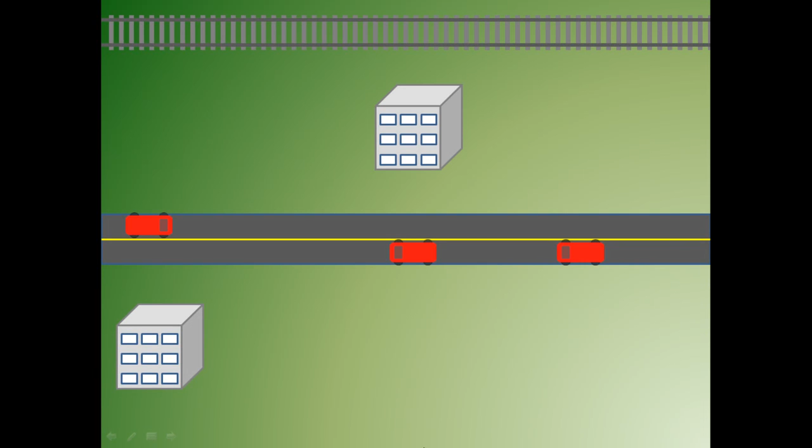This 10-minute presentation is in several parts explaining how this study is critical in protecting national infrastructure while avoiding regret and exorbitant cost. Consider a transportation corridor facing future land development. Land development adjacent to corridors not only leads to greater traffic along the corridors, but also requires taxpayer funding for protective measures to be taken in order to minimize congestion and loss of productivity in the area.

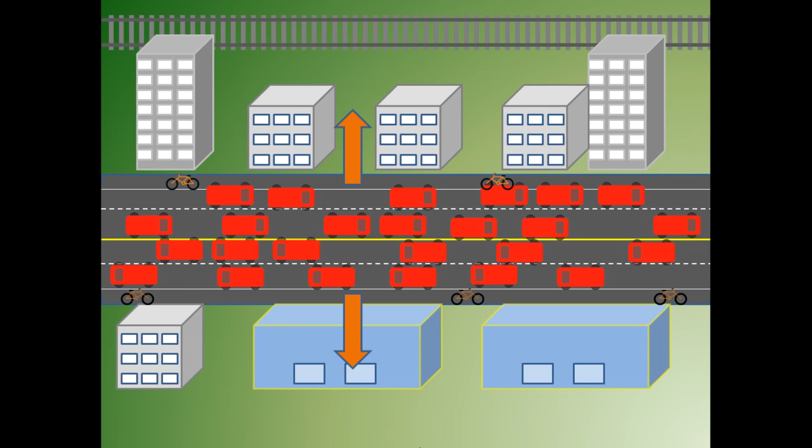Eventually, costly right-of-way may need to be purchased for corridor improvements. However, if proper proactive planning is not implemented, land may not be available, causing serious problems for the transportation infrastructure. These serious risks need to be studied and managed in order to avoid surprise, regret, and belated action. This problem extends across all varieties of infrastructure systems. Of the U.S. Department of Homeland Security's 17 most critical infrastructure list, some, more than others, have a geographic component.

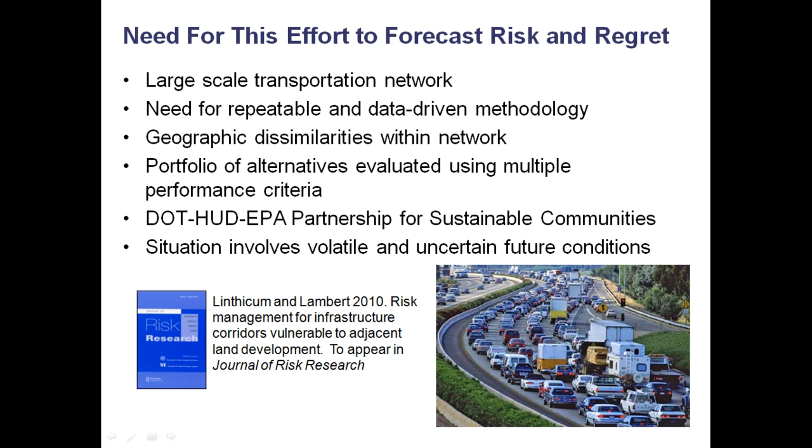The goal of this study is to analyze a large-scale transportation network vulnerable to adjacent land development and prioritize sections of corridor for investment. An earlier approach to this work by Linthicum and Lambert was found to have particular deficiencies. This study contributes to the literature by incorporating the time domain on intervals, can easily be updated with new information, addresses geographical differences in development patterns, and considers volatile and uncertain conditions, such as climate and other environmental changes, changes in social or demographic patterns and land uses, changes in regulations, as well as many others.

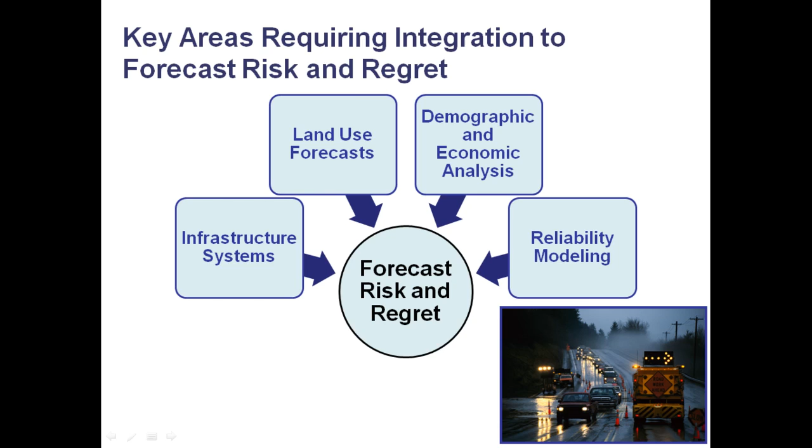The adverse consequences of unexpected land development may include unnecessary congestion and inefficiencies along critical transportation corridors that may lead to lost productivity, increased fuel emissions, and loss to nearby businesses. In extreme events, the consequences can be even more severe. Corridor protection involving improved access management and capacity increases may encourage development and population growth in some areas, thereby allowing for greater efficiencies in the transportation structure. Greater economies of scale can be found in densely used areas, while increased tax revenues and employment aid entire communities.

It becomes apparent that there are important trade-offs between risk and opportunity in this study. These will be quantified and evaluated in order to make the best decisions for the transportation network as a whole. Costs include cost of planning time, including salaries and overhead, right-of-way purchasing, construction or operational changes, access management, and others.

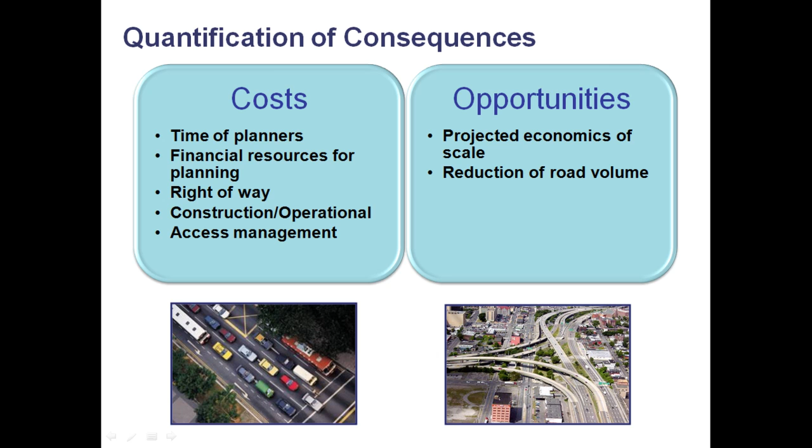The most challenging aspect of the data extraction involved the integration of quantitative and qualitative data available in widely varying scales. The Landsat National Land Cover Database offered geographical land use and land use change information. The Bureau of Economic Analysis gave us valuable employment and economic indicator data. The U.S. Census shared a wide array of socio-demographic data. The Department of Housing and Urban Development held key indicators on housing and affordability. These databases, in addition to many others, were essential for this effort.

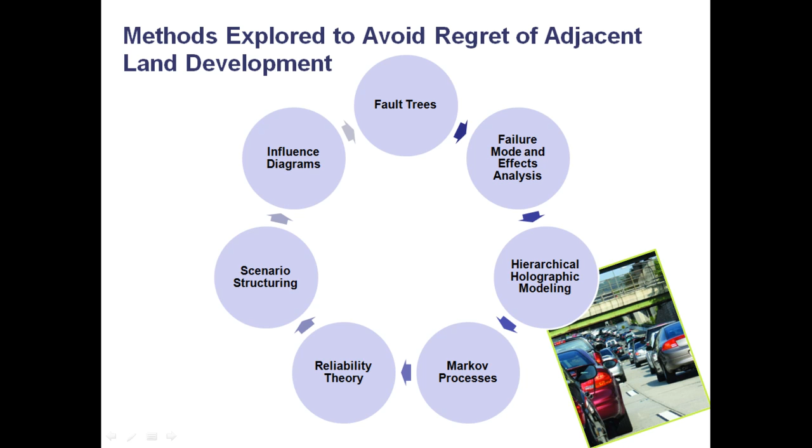Expert elicitation with officials affiliated with transportation planning, economic development, and others allowed for determination of the most relevant factors, an understanding of the relationships between those factors, and the financial costs and opportunities. The objective is mainly influenced by the determined time to development, cost for protection, and the opportunities arising from protection.

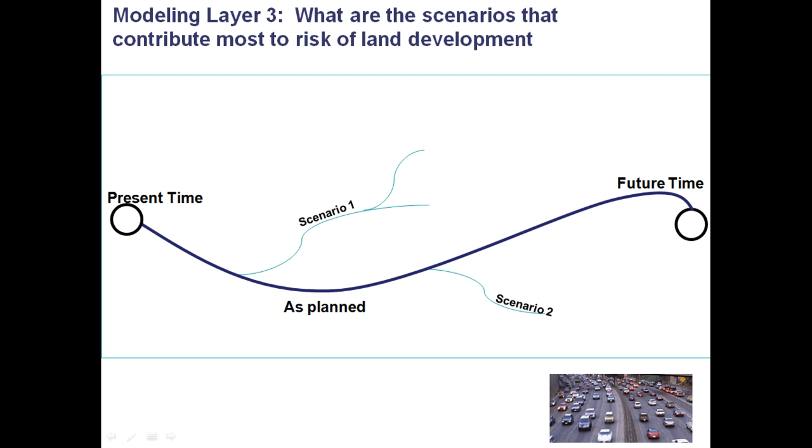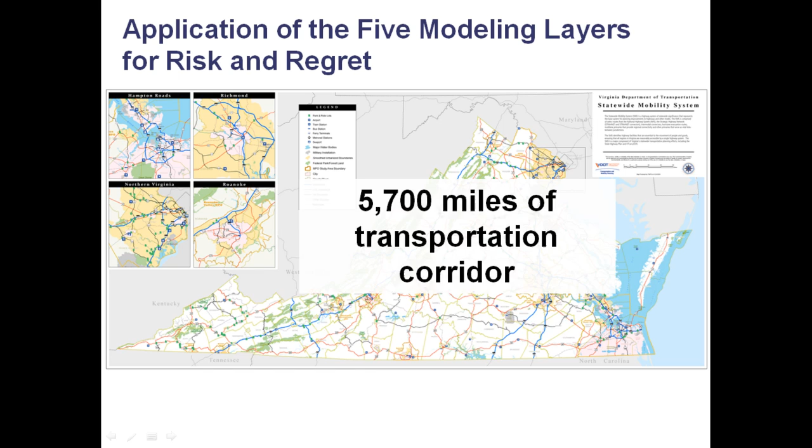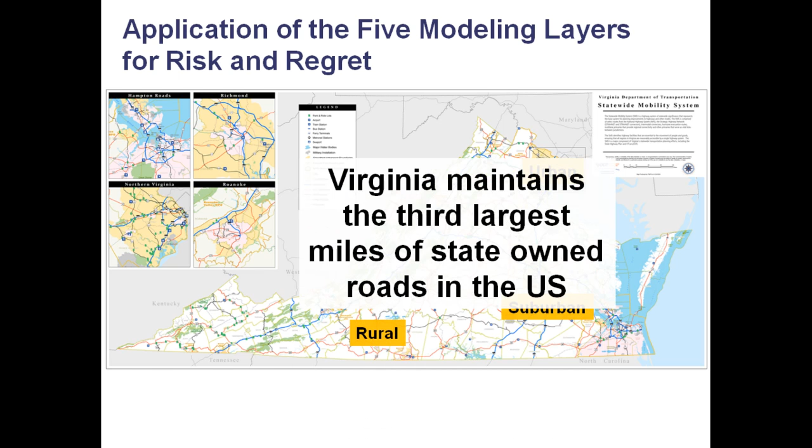This method is being tested on the Virginia statewide mobility system. This large transportation network spans over 5,700 miles, joins 95 counties and 39 independent cities, and neighbors 5 states. This network covers a very geographically diverse area, including the largely urban north, suburban areas, and largely rural areas. The diversity in areas throughout the state causes separate land development patterns to exist between rural, urban, and suburban areas.

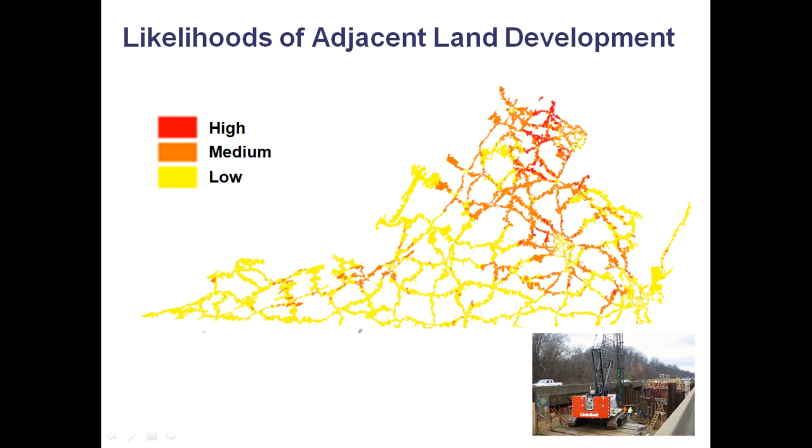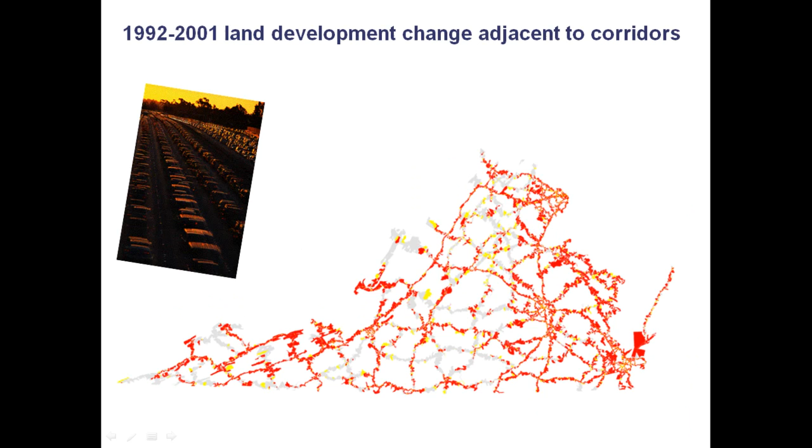Factor data is then combined using relationships elicited from experts to quantify likelihoods of land development for each census block adjacent to the studied corridors. The fourth model analyzes the time to development for sections of corridor. Markov models and reliability theory aided in the conversion from the likelihood of development to an estimate of time to development.

The fifth model illuminates the options that are available. Costs and benefits are weighed along fixed-length time intervals, in this case 5, 10, and 10-plus year periods. This allows for first-pass decisions to be made regarding prioritization. Prioritization results show darker areas requiring the most prompt action. The outputs of the priorities can then be evaluated by transportation planners to make future funding decisions.

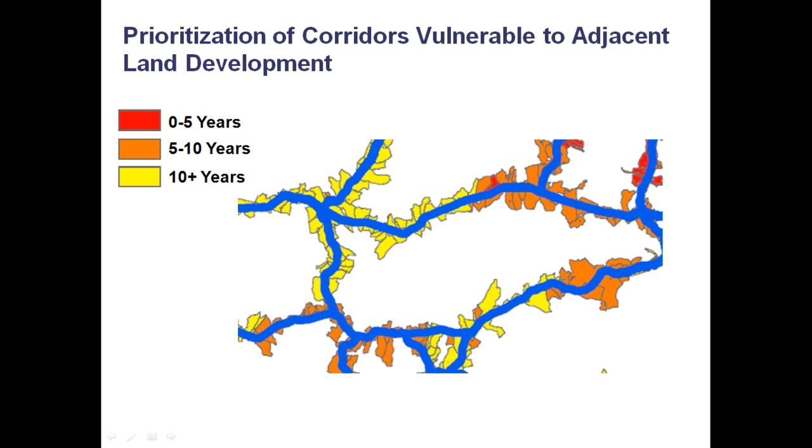However, once initial prioritizations are made, there is much more to be learned. The automated nature of this analysis allows for complex calculations of multiple scenarios to be quickly computed. As expected, many corridor sections show different prioritizations and extreme differences in costs. From a risk viewpoint, these critical scenarios pose the greatest concern and required further study.

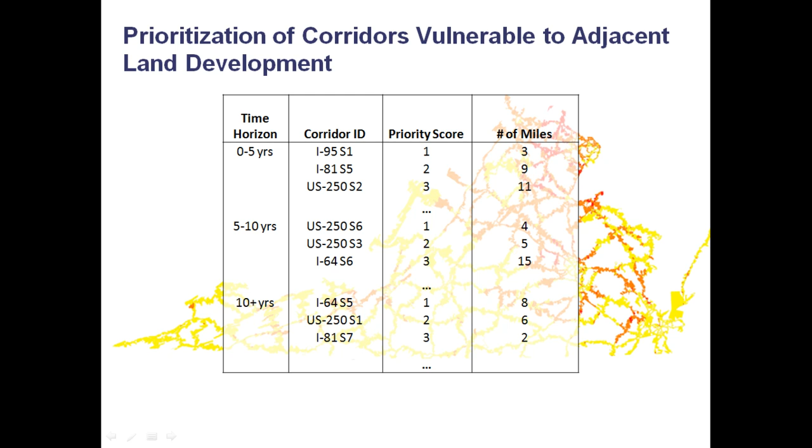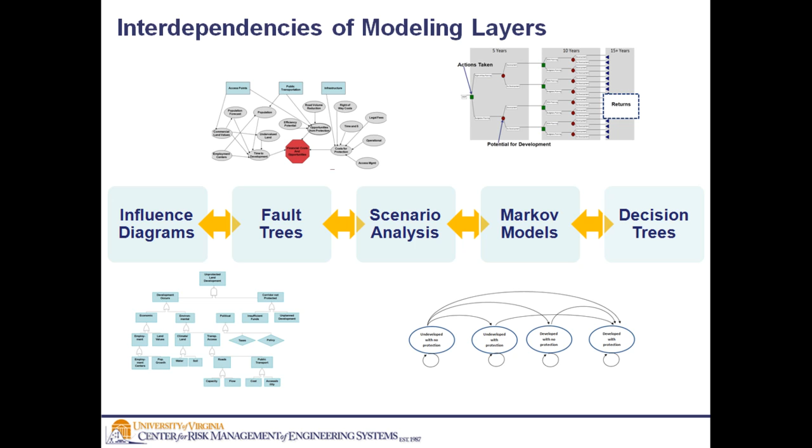In summary, 5 major models were used to determine corridors vulnerable to adjacent land development. Applications of the study can be used to aid in land use and zoning, classification of corridors, and other transportation infrastructure such as bike, pedestrian, rail, bus, and air. This effort is critical to avoid the exaggerated costs and impaired service levels due to the need to accommodate adjacent land development along corridors. This effort is and will be a topic of wide interest to SRA members.

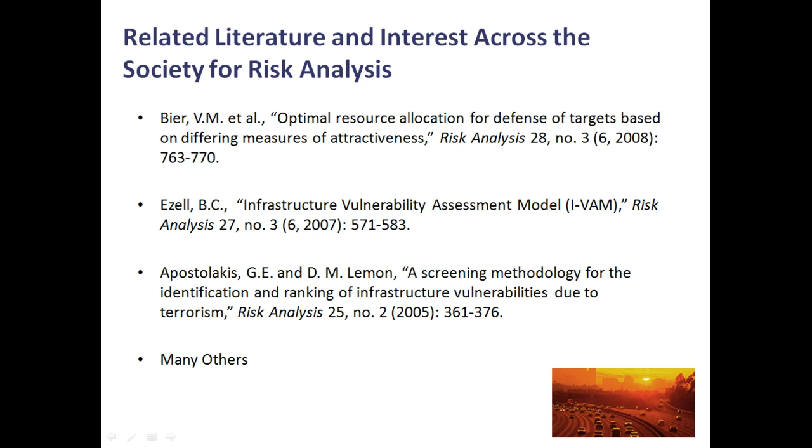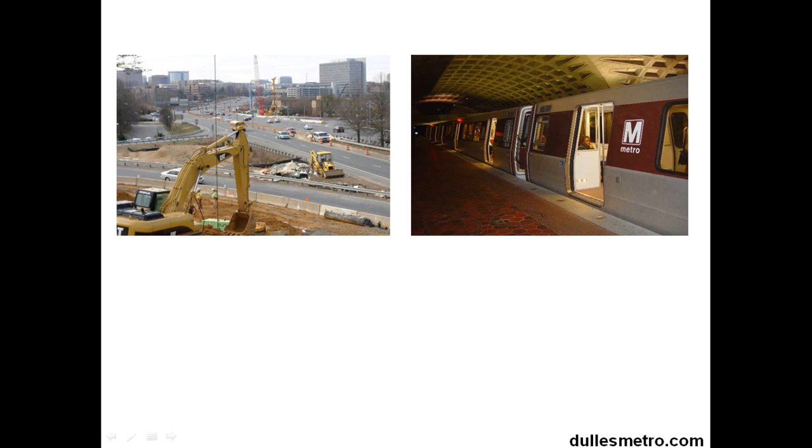The Dulles Metro Rail expansion in Northern Virginia is one example of the high costs and inconvenience resulting from the need to retrofit transportation infrastructure in heavily traveled areas. Up to 20% of the $5 billion could have been avoided with risk-based land use planning. This concludes a brief description of this study.

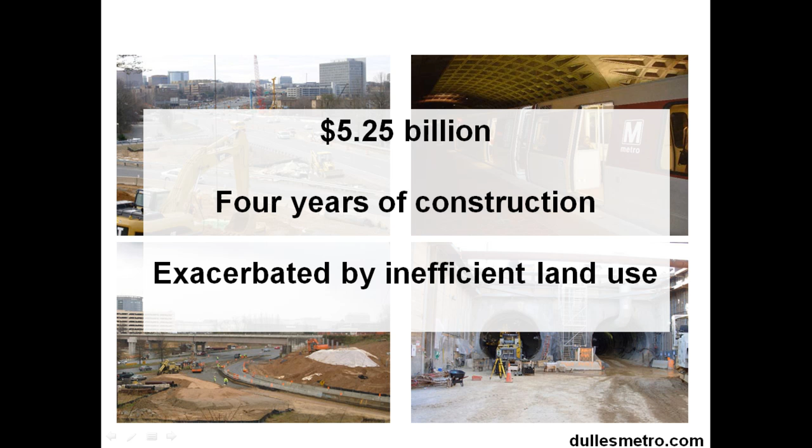This may be the first time a risk-based approach is being used to forecast land development and prioritize corridors for protection along multiple fixed interval time lengths. This approach is flexible and can accommodate a large variety of data sets. The data-driven methodology allows for objective and large-scale decision-making. The automated structure allows for the model to be easily passed to transportation planners for future updated use and even be transferred online for collaboration between states.

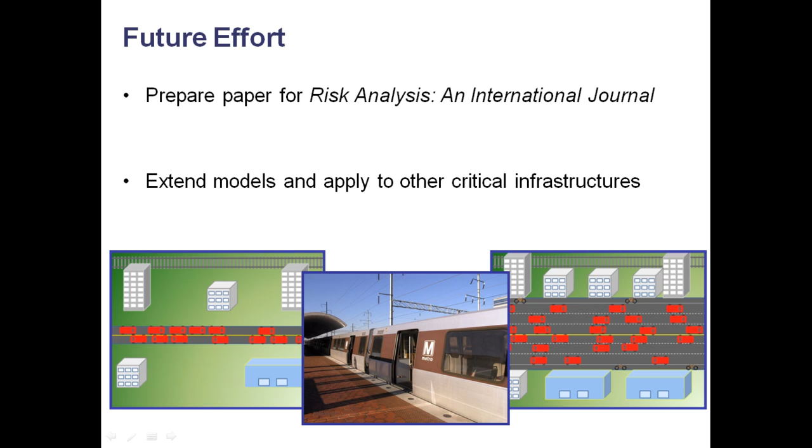This effort has grown my experience and interest for a career in technology consulting and risk analysis. I hope this presentation is of interest across the society, where infrastructure is related to areas such as health and the environment. Thank you for your time.